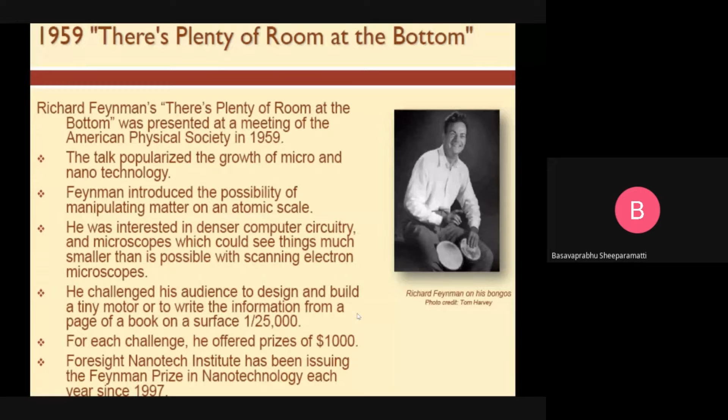And it all started with Richard Feynman's vision. He gave a talk in 1959 at a meeting of the American Physical Society. The title of the talk was "There's plenty of room at the bottom." This opened the way for micro technology as well as nanotechnology. In his talk in 1959, he challenged to make an electric motor and also to write characters at 1/25,000th the size, so that the complete Encyclopedia Britannica can be fitted in a small integrated circuit. So his challenge opened up new ways for both micro and nano technology.

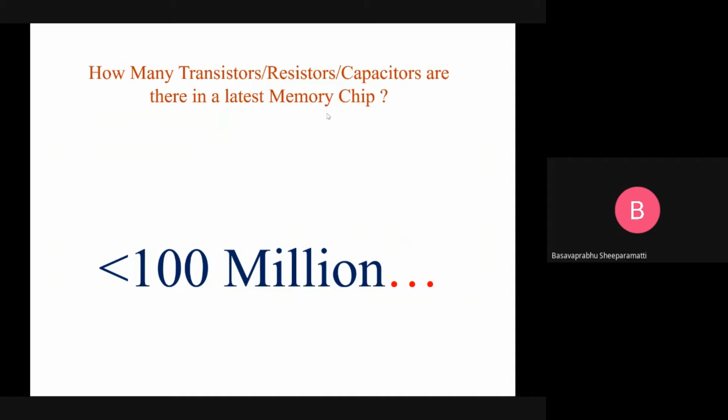Okay. So here, how many transistors, resistors, and capacitors are there in a latest memory chip? Latest, it is more than 100 million, 1 billion, more than a billion, more than the population of India, 1.3. Now it is nearing 5 billion also.

Similarly, when we say it is a micro electromechanical system, a question comes whether it is an integrated circuit or a machine. Now we can call it a machine inside an IC, because you can see this is a proof mass, supported by 1, 2, 3, 4 cantilevers, and this proof mass moves. Suppose it is part of an accelerometer IC, then it moves up or down, whether it is used for a sudden acceleration or sudden deceleration.

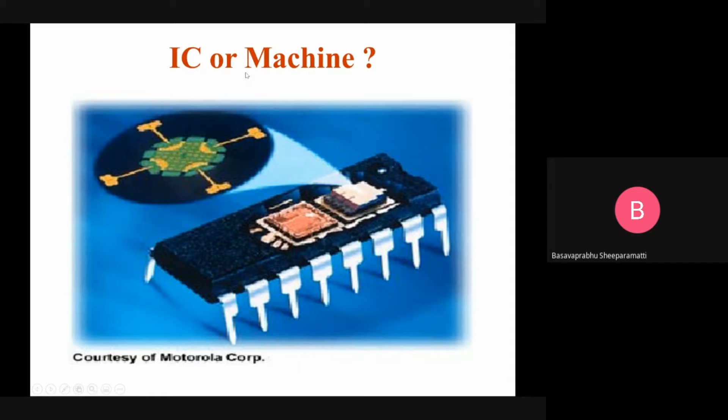So that movable part is also miniaturized and kept inside integrated circuits, and associated with that there is electronic circuitry, and both together are kept inside an IC. That's why, whether it is an integrated circuit or machine, we can say it is a machine inside an integrated circuit.

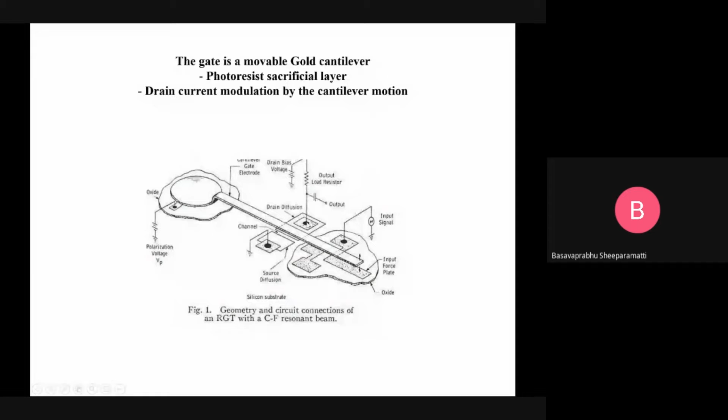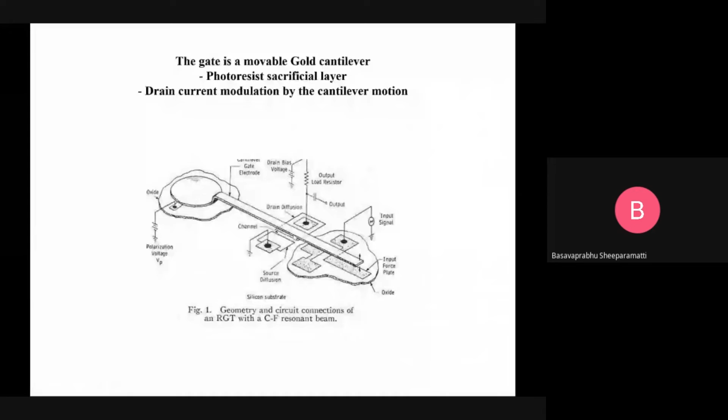So this is the first movable structure that was created in a transistor, sometime in 1967 or so. This was done between source and drain. A movable part here, this is the cantilever. When it came near this surface, because it is charged, it facilitated the flow of majority carriers from source to drain. So it was a resonant gate transistor. This is the first movable part, in 1967, inside an integrated circuit, and the basic operation of a MOS transistor.

So then what is this micro, nano? This is source and drain with an oxide layer in between, and this gap between source and drain we used to measure in micrometer technology. If this length is between 8 to 10 micrometers, then we call it 8 micron, 10 micron technology. Then came 1 to 1.4 micron technology. Now we are in 3 to 5 nanometer technology. These are some stages.

Now we may even go down and ultimately find a single electron transistor, where we just add one electron and the transistor becomes on. Remove one electron, the transistor may become off. Single electron transistors also have been achieved.

So if this gap is in microns, then the transistor itself you can call a MEMS structure. Of course, there are no moving parts, but this is how the terminology has been defined: the smallest feature in a movable part or in a structure. If it is in microns, or if it is less than 100 nanometers, then this itself can be called a nano transistor. Micro transistors, everybody knows, have been used for many years, 30-40 years.

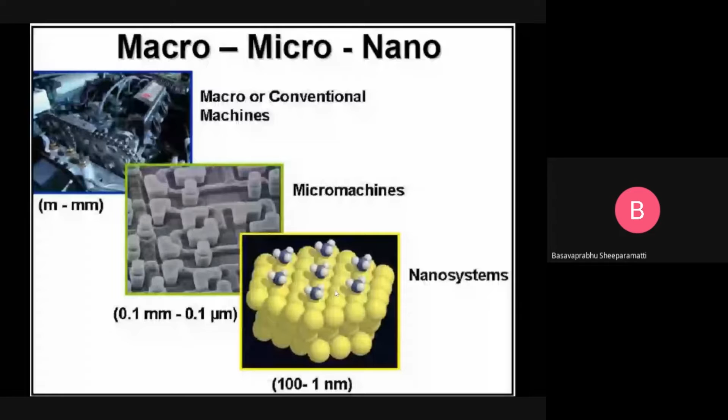Similarly, a DNA structure can be considered a nano electromechanical system. A typical cell, as I said, is around 10 microns, the nucleus 2 to 3 microns. In that, so many nuclear particles are there, and their DNA structure is there. Those things can be considered natural nano electromechanical systems.

So why should one go for MEMS? Miniaturization with no loss of functionality. Without affecting its functionality, if you can make MEMS, then fantastic, because we can use less material, less power, and it occupies a small space. So many advantages are there for MEMS. But this miniaturization should not affect the functionality of the system for which it is made.

If somebody says Tata's Nano car, it doesn't mean that its size is nano. The purpose of a car is to transport people. If the car is made so small that I cannot enter it, then it is of no use. Its functionality is affected; it cannot carry people. Then that miniaturization is of no use. So miniaturization with no loss of functionality.

And integration to form a monolithic system, improved reproducibility. One important thing here is batch fabrication. Batch fabrication means at a time you are imprinting say 50, 100, 200, 500 integrated circuits on an 8-inch, 12-inch or 15-inch wafer, depending upon the circuit complexity. All the 50 or 200 ICs are made simultaneously in a batch. This is the reason why the cost of electronics is coming down day by day, while the functionality is increasing like anything.

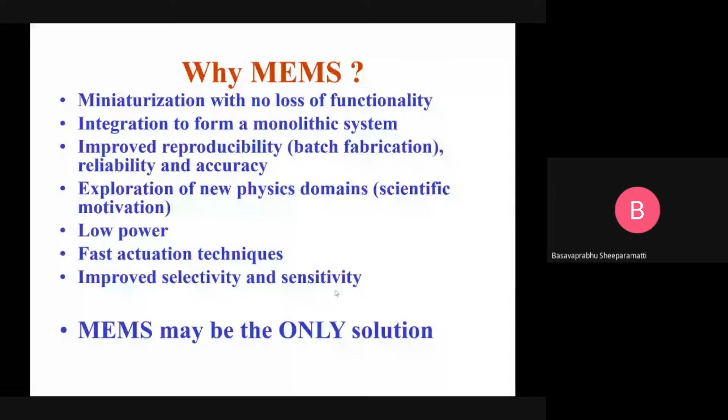In some cases MEMS may be the only solution. Suppose I want to go into a blood vessel and do some operation, then I have to go for MEMS only. So these are general advantages: reduced size, high precision, improved performance, minimal use of resources, batch fabrication. Because of batch fabrication, the cost reduces, and new capabilities.

This new capability is very important. If you go for some multi-physics domain, we can explore many possibilities in the micro domain. Once again, it depends upon the imagination of the designer. I'll quickly go through some of the popular applications. The pressure sensors and inkjet printer nozzle were the first MEMS structures. Then sometime in the 90s came the airbag trigger system.

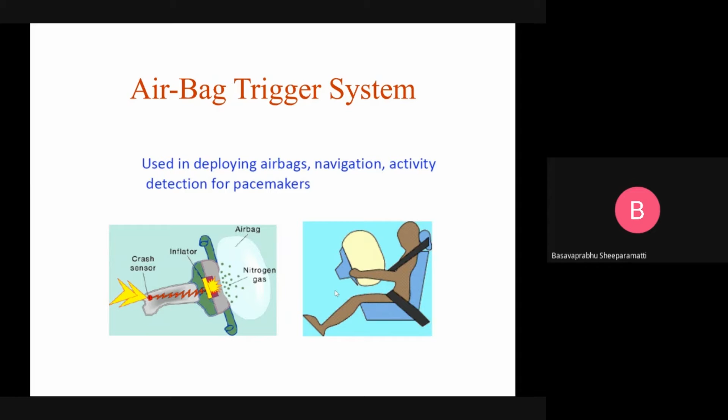I think everybody knows about it. At the time of sudden deceleration, an airbag opens up, thus protecting the driver. So this is the IC. In this IC you can see both the movable parts and the electronic circuitry in the same chip. The accelerometer for airbags, 1995. ADXL series ICs, ADXL 202, came in, and they are being widely used in cars and other automobiles.

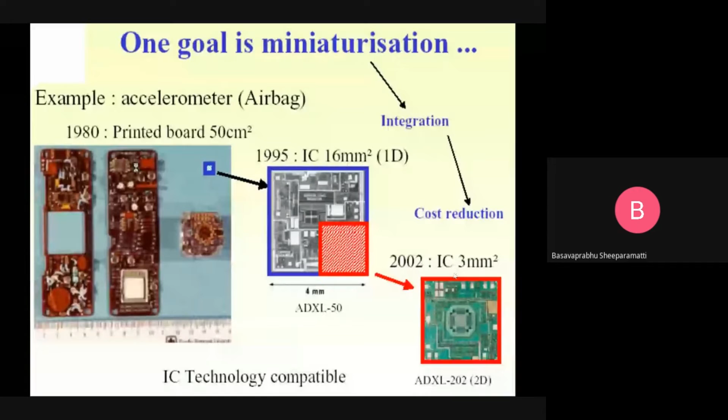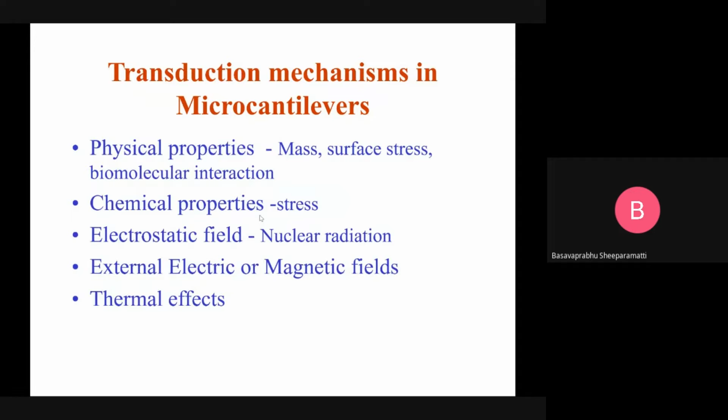Biomedical, also identification. Environment, also so many gases, so many biological parameters can be sensed with this. That's why more than 100 micro cantilever based sensors are there in the market. Here, mass, surface stress, etc. Biomolecular interaction, stress, nuclear radiation, external. These are some of the parameters you can think of. So, bending of micro cantilever is basically surface stress, thermal action, electrostatic field, external. Any one of these parameters can be easily identified with the micro cantilever alone.

So this switch, ultimately in a computer processor, a transistor is used only for on and off, because your whole computer processes zeros and ones, streams of zeros and ones, whether it is audio, video, whatever data. It is ultimately represented in terms of zeros and ones. So ideally, you can replace the CPU with an array of such small micro cantilevers used as a switch. But of course, people are not after that because there are some other problems. But one can think of a purely mechanical CPU. So even that can be considered.

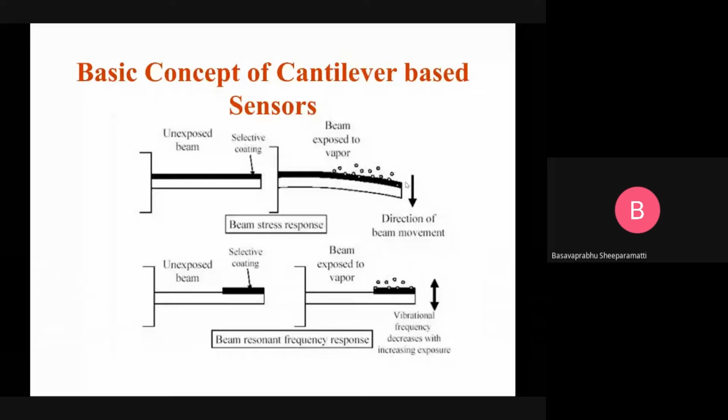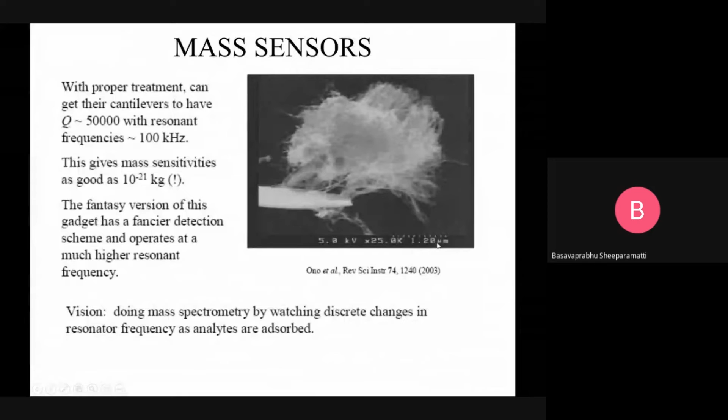So these are some examples. This is again one more thing. See, this gives a mass sensitivity as good as 10 to the power of minus 21 kg. Once again here, this dotted line, from here to here, this much distance is 1.2 micrometer. So you can imagine how small the cantilever is.

One more thing is, one can use this as a micro battery. Here this is a radioactive source at the bottom, and this is the copper layer. This radioactive source generates radioactive particles, some negatively charged particles, and when it loses negatively charged particles, this becomes positive and this becomes negative, and it attracts. When it attracts, once again discharge takes place, then it goes back like this, and it sets into vibration. When this is set into vibration, the piezoelectric plate fixed here is subjected to vibration, and across this piezoelectric plate one can tap the DC power. So thus it acts as a micro battery.

But here you may ask one question: radioactivity is dangerous. But there are some low-end radioactive sources. If they are used here, then it can work, so that you need not charge. Otherwise, what happens? Say mobile batteries. You need to charge every few hours, every day at least. And after 2 years of usage, its holding capacity comes down, and you need to charge it very often.

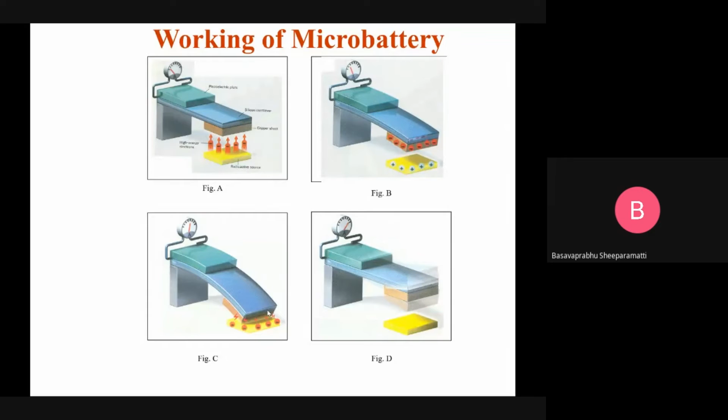Actually, when this concept was conceived, somebody made a cantilever like this, and it was set into vibration for say 1 week or so. It continued vibrating, then manually they stopped it. That's the history behind it. So such a thing is feasible and they have made this, and of course it has not yet become a product.

So here, think of a sensor network. Suppose this is a sensor network and you are deploying wireless sensors to collect data in, say, a forest, for environmental monitoring and all, through a wireless structure. Then you have to deploy these sensors. There are some challenges like size, cost, power requirement, and power is very crucial here in a wireless sensor network.

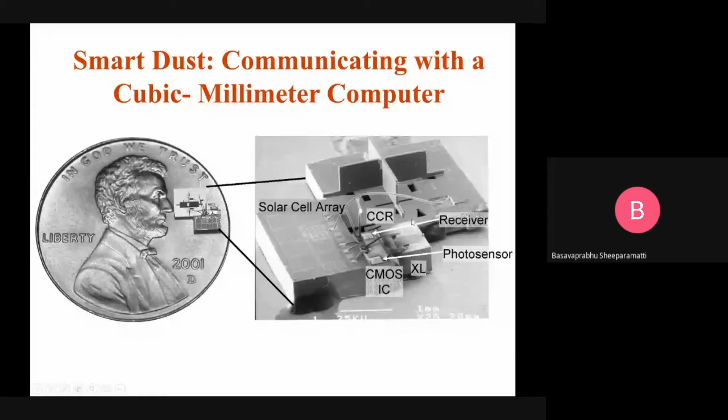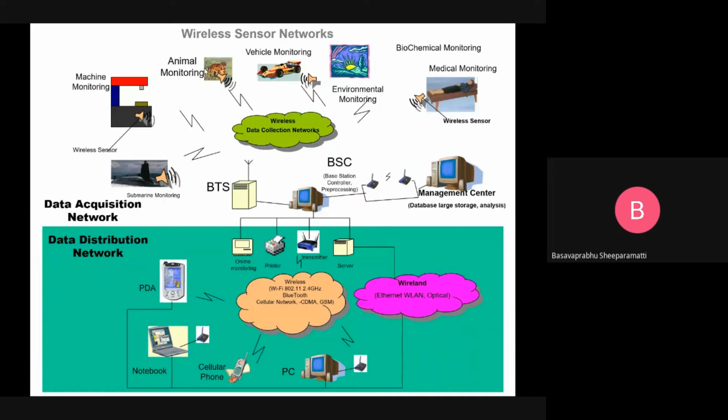So in such things people obviously go for a small size structure, miniaturization, which is required here also. A small solar cell array; see the size, it's a coin, 1 cent. So such sensor nodes are deployed, and they collect the information and send the data to a centralized processor, and the data about the forest or a big area can be monitored continuously. Such things are possible only because of miniaturization.

I'll not cover the making of MEMS because Sir has already covered it, I think. Anyway, I'll just quickly tell what the processes are. Crystal growth: though silicon is available abundantly in nature, it is in the form of silicates. You have to extract pure silicon and make crystalline silicon, because we need crystalline silicon for making wafers, and on wafers, using planar technology, we grow our electronic components. Nowadays, because of MEMS, we make movable parts also.

So here the crystal is grown using a seed crystal, wafering is done, and on the wafer we repeatedly do film formation, lithography, etching, with different masks every time. We make the film, carry out lithography using one mask set, remove unwanted material, then go back, use one more litho mask, do etching again, and sometimes we may have to carry out impurity doping. For making MEMS, typically around 20 masks are required maximum.

Whereas if you are making an integrated circuit, you need around 200 masks because it is a very complex process, so many devices and their interconnects. So for an integrated circuit, maximum around 200 masks are required, whereas in the case of MEMS, maximum around 20 masks. With 20 masks this process is repeated; in case of IC, with 200 masks this process is repeated.

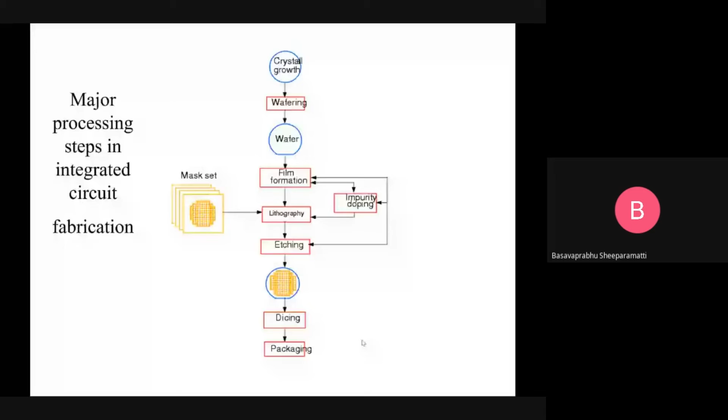Okay, then of these MEMS components, and then we have to cut them out, and we have to carry out the testing. Okay, so broadly surface, bulk, and LIGA processes are there, and this is the typical, this is the mask. Okay, so on the mask, here they focus.

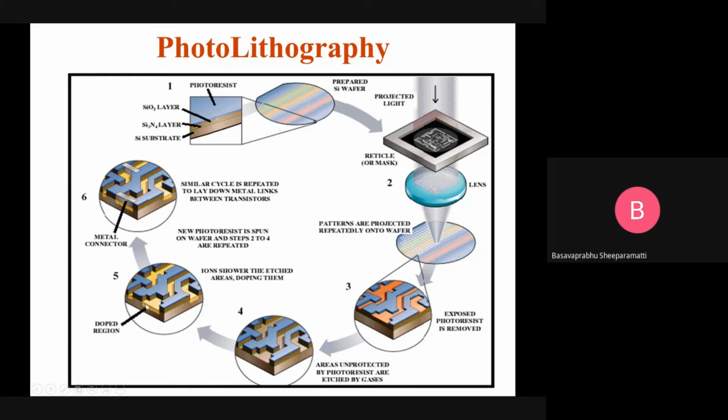Okay, this is what miniaturization is. And each one of these things is an integrated circuit. Then depending upon positive photoresist or negative photoresist, some part is retained, some part is removed. Ultimately we end up with a structure like this. Okay, so I'll not go in detail because sir has already covered.

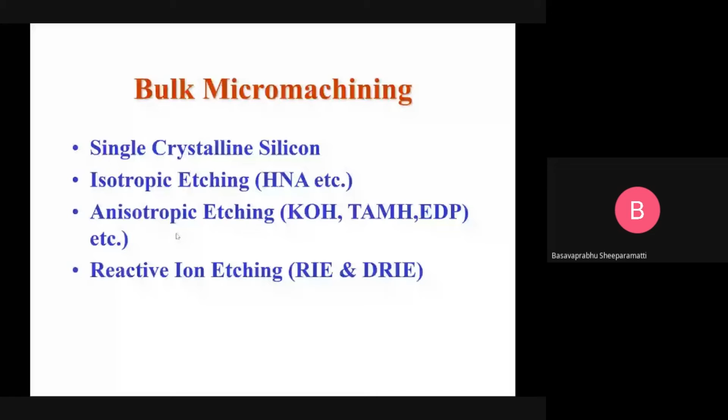make the pattern using photolithography, and on that we retain some material or structure which is required, and remove unwanted structure. That's all. So like this, layer by layer, it is grown. And there is ideally no limitation for this.

But if you go for bulk micromachining, it is like making a sculpture. A big stone is brought, and initially whatever is not required is cut. Then make a face, make a shoulder, collar, like that. Then you go to the inner details, even you can make hairs on his head.

Then make a nose, lips, and finally even you can make goggles for him. Such sculptures you have seen. So here the thing is it is removing unwanted material from a bulk. So these are the major MEMS fabrication techniques for making movable parts.

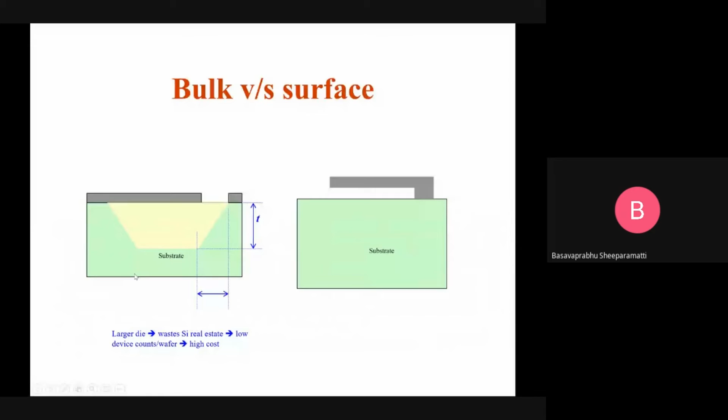Then this portion you remove, and you'll end up with this structure. So this is a surface micromachined cantilever. This is a bulk micromachined cantilever. I think this figure will clearly give the idea about bulk versus surface.

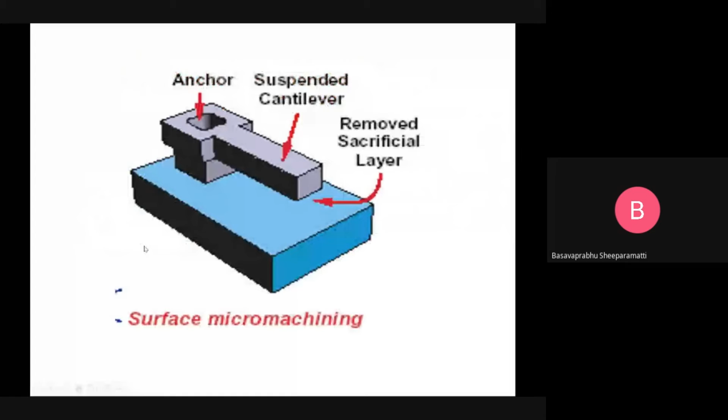And the LIGA process, one more process, as I said, is like injection molding. They take plastic, put it in a machine and do the injection molding, like how PET bottles are made. That way one can do the molding of these microstructures using the LIGA process. So quickly I have covered this because it may be repetition for you, but here I'll go and tell you.

So once again, in order to hold these microstructures, or in order to connect these nanostructures, one needs microstructures. That is the only solution. But in many cases, in the nano domain, the sensing that takes place may not be sufficient. There is very little difference, so you cannot clearly tell, though by definition something less than 100 nanometers is a nanostructure or nanoelectromechanical system.

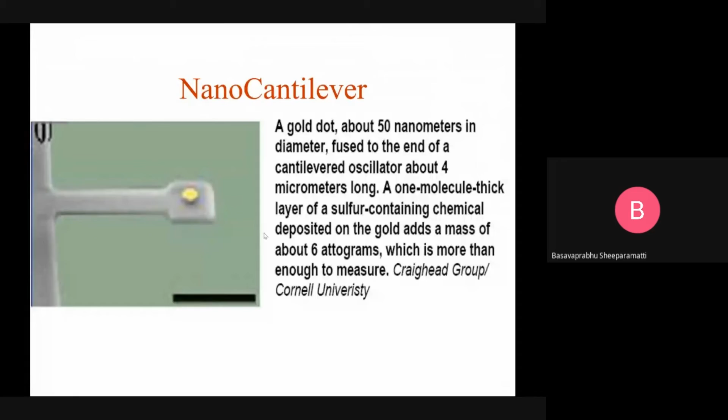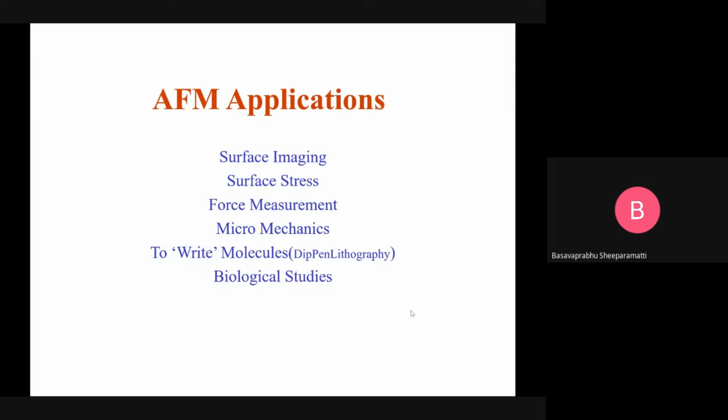So this is a very important instrument which is comparatively much cheaper than a conventional electron microscope, and maintenance is also very less, size is also very less. AFM microscope. Okay, so when we come to computational challenges, this is a very important thing.

I have given just a quick introduction to MEMS. I'm sorry if some slides are repeated with Manjunath sir. Here when we come to computational challenges, MEMS modeling and simulation tools invariably use

some tools like ANSYS tools. Finite element method is inbuilt in all MEMS modeling and simulation tools. Not only this, the number of MEMS structures which are normally required for achieving a particular job also poses some challenges.

Because n number of MEMS can be used simultaneously, because whether you make one MEMS structure or 100 MEMS structures, the cost hardly varies. This is the specialty of batch fabrication. So even for a few rupees, say 10 rupees, or for 10 cents, or say $2 to $3, one can have some 100 MEMS structures.

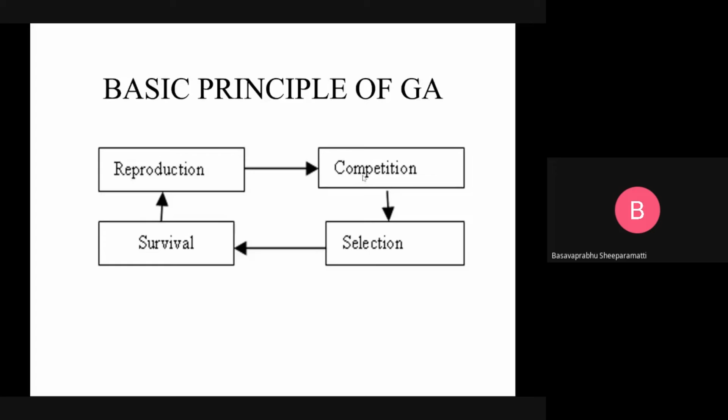Like this you can achieve design parameters in terms of geometry, length, width, thickness, and find a required pull-in voltage. What should be the length, the better width, the better thickness can be explored by genetic algorithms. We know the concept of genetics: reproduction, competition, selection, survival. The same concept is written in the form of an algorithm, called a genetic algorithm.

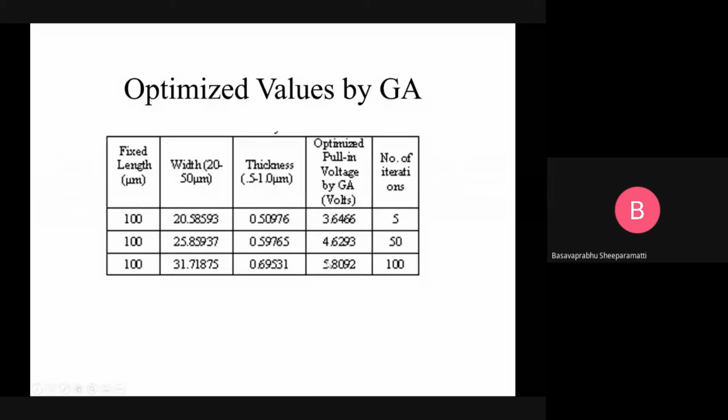So to find the optimized pull-in voltage, we have given some values here. Length we have taken fixed, width we have given a range, say 20 to 50 micrometers, thickness a range of 0.5 to 1 micrometer, then optimize the pull-in voltage. So now we are bringing it down to 3 or 4 or 5 volts using a genetic algorithm. Similarly, for a disk resonator we have used genetic algorithms.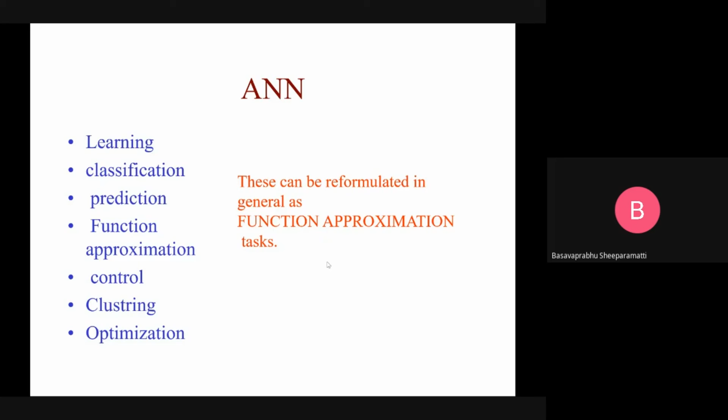Obviously, whenever we do optimization using a genetic algorithm, we need a crisp equation. If that crisp equation is not there, you can always go for ANN, artificial neural network. Learning, classification, prediction, function approximation, control, clustering, optimization, all these operations can be done using an artificial neural network. Here I'm giving some very simple codes.

To train an ANN structure, it's just a few-line program, 7-8 lines, 8 lines. Of course, you need the ANN toolbox in MATLAB; this is MATLAB code. If you simply type this, it gives you binary to decimal conversion, so any binary number can be converted into a decimal number. Why I'm giving this is that learning ANN is not a difficult thing.

Similarly, this is decimal to binary conversion. This shows how we can use ANN: decimal numbers 0 to 9 here and their corresponding outputs. You put them in and train the network. Once you train the network with these input-output parameters, for any arbitrary input you can predict the output. That is the whole idea behind going for ANN in this case.

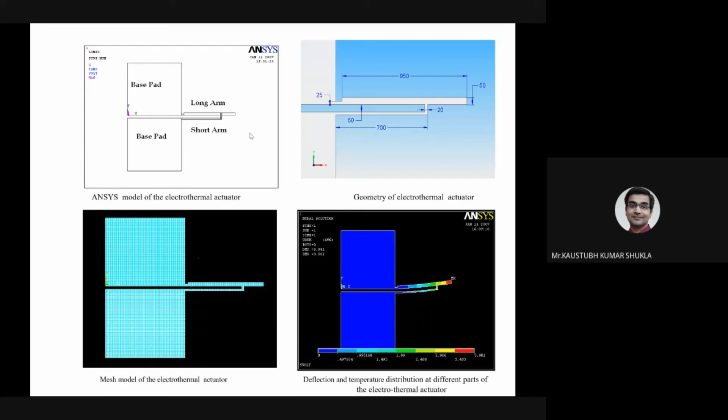So here, an electrothermal actuator is fabricated. These are two base pads. When you apply some voltage between these two, the current passes through this and comes back here. Because the cross sections of these two are different, as they are in microns, I'll show you the dimensions later. When current passes through this, it heats up these two arms.

This is called the long arm, this is the short arm. The long arm's dimension is around 1000 microns, 950 plus 50. This is around 750 microns, 700 microns. Its cross section is 50 by 50, whereas this is 20 by 20. This is simulated using ANSYS; here it has been done using ANSYS. One can use either CoventorWare or COMSOL also.

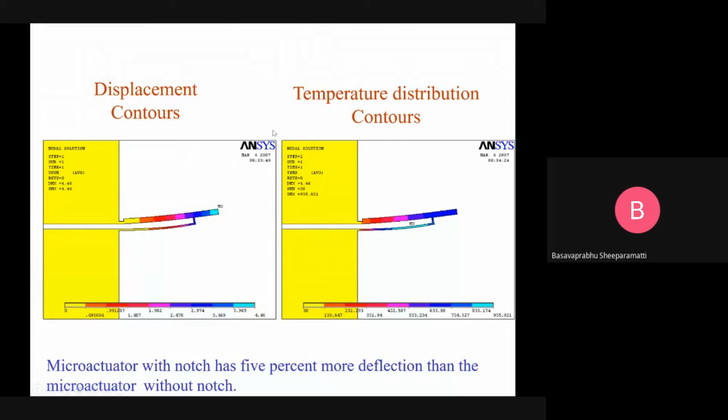Then you can see how the stress is distributed and how the deflection takes place. Displacement contours and temperature distribution contours have been shown. Obviously, for the combination of these two, we cannot have an analytical expression. So the solution is what? Make this model, take some set of readings, and use this set of readings to train the neural network.

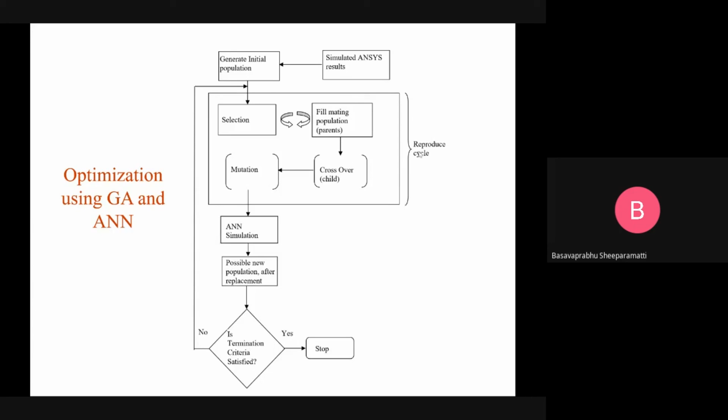And use the genetic algorithm to find the optimized dimension for a particular set of input-outputs, which are ultimately considered for fabrication. That is nothing but optimization using genetic algorithm and ANN. Normally people carry out optimization without using ANN, because crisp analytical equations are there. But for this application there is no crisp analytical equation. That's why if you go for this, it gives you the desired dimensions for achieving the output.

So here, these are optimized dimensions. See, length 1000 micron, 750 micron, voltage, deflection, 11.5. When we carry out optimization, not only one value, we can consider a few best values possible. So in order to achieve a deflection of around 11.5 micron, what should be the length of the long arm, the length of the short arm, and what voltage you have to apply, that has been optimized here.

Long arm, short arm, in order to deflect the tip of this structure. So why this structure may be considered, if you ask? This can be used as a leg for a millipede, a centipede you might have heard of. In Kannada we call it a jerry.

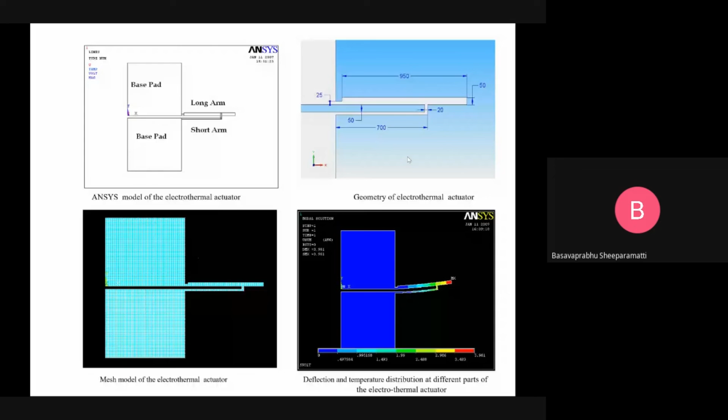It is some small creature which has hundreds of legs and crawls. So in order to make it move, if it is a robotic millipede or centipede, you can switch these legs one after the other, like that. So for such applications you can go for this; one can also think of these things.

But last but not least, at the end, I would like to share this: the future of MEMS and IoT. Just because these are of small size and very sensitive, one can design a MEMS device for sensing anything. We already know that man-made sensors are very powerful. Normally we call our senses indriyas. All our panchendriyas sense environmental parameters for us, and we interact.

We are alive because we have sensors, we have panchendriyas. We interact and we protect ourselves, or we understand things. But compared to the natural sensors built into the human body, man-made sensors are more powerful. They make us see light which we can't see with our naked eyes, feel pressures which we cannot sense with our skin, what we can't hear, can't sense, can't see. All such natural phenomena are sensed by our man-made sensors.